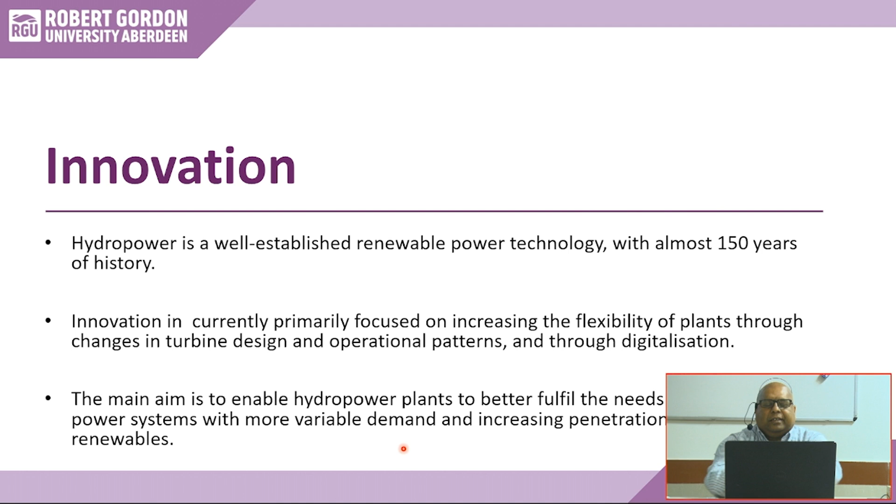Maybe you think you have to be somebody like Einstein or Newton to innovate something, but it's not actually like that. It's actually looking at what you are doing in everyday life and how you can make changes to make it better. Come up with a new system, new product, new process, a more efficient way of doing things. A simple thing will be innovative, which is not there, but you are bringing in there to make it better.

Think about this all the time. I talk about innovation all the time because innovative products will only keep the economy going, because we are moving away from almost an agriculture-based society to an industrial-based society. Even we are not having large industry in many Western countries anymore, and it's moving into automation and AI and things like that. So innovation is the key.

Don't think you have to be like Einstein or Newton or someone else to become an innovator. You can be an innovator if you think about what I'm doing today, how I can make changes to make it better, something new, improve the process.

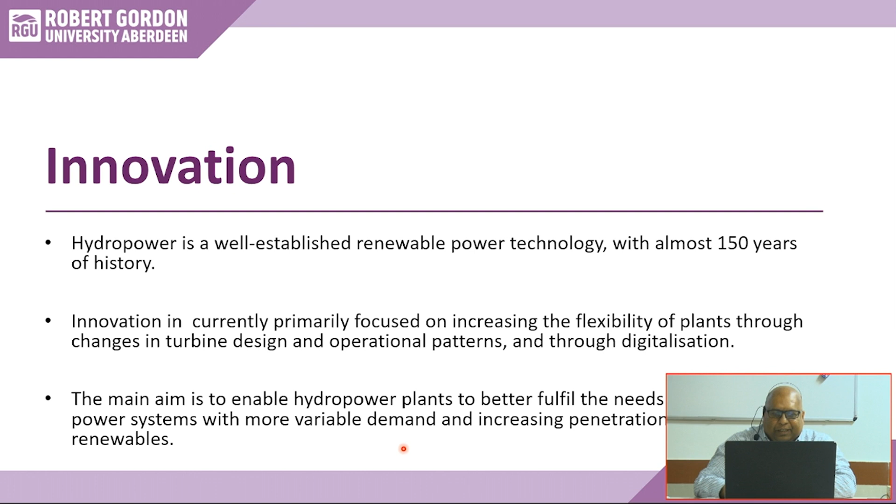Let's look at hydro energy devices that have been there for 150 years or more. Pelton wheel I talked about - these are the conventional energy source. In a Pelton wheel, you have to have a big reservoir water body. It comes through a pipe. It has to be very high, maybe 100 meters, water coming down through a nozzle at very high speed, and it impacts on the blade, and that rotates the blade. If you attach a generator on this, you will generate electricity. To use that, you need a high water head, maybe 100 meters high. You have to collect water at 100 meters high and get it down through a pipe. That is called a Pelton wheel.

Then you have a Francis turbine, which can work at less height, maybe 20 meters of water. The advantage of this is that it runs as what you call a reaction turbine. The water comes through a big gap here. Water comes in, through the body, and goes out, and this starts to rotate. So water comes to the blade radially and discharges axially down. Water comes from here, goes radially in and then out. This is a Francis turbine.

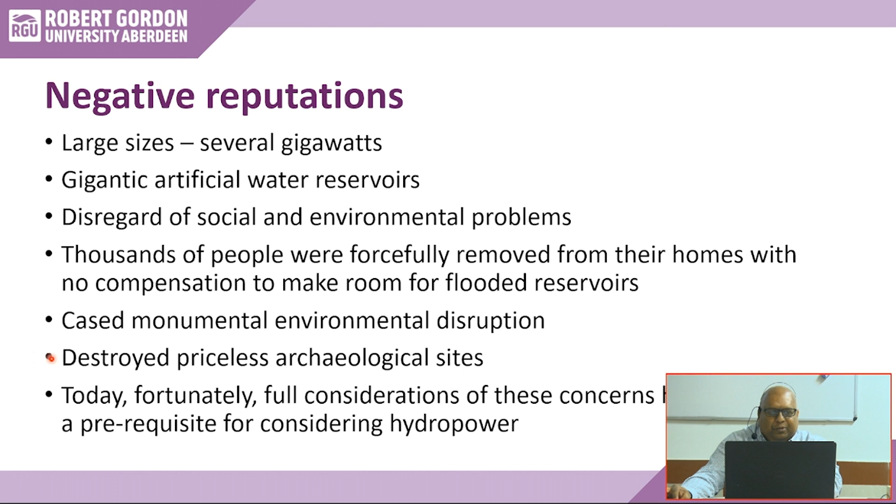Today, fortunately, full consideration of these concerns has become a prerequisite for hydro power. These days you won't be able to avoid that, because the market for electricity generation is mostly privatized now, especially in Western countries. If you want permission to build this type of hydroelectric power plant, you need to consider the social impact and environmental impact of every aspect. You have to write a report with detailed analysis before you get permission to build that type of power plant.

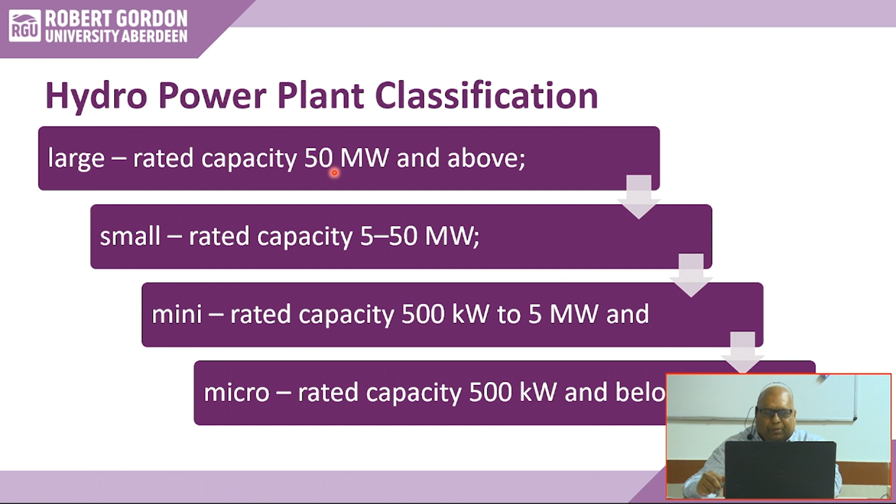If you have large rated capacity, 50 megawatts or more, we call it large. Small capacity is 5 to 50 megawatts. Mini rated capacity is 500 kilowatts to 5 megawatts, and micro, the smallest one, is 500 kilowatts or below. These are the power ratings we use for hydro power plants. So from megawatts we can go up to gigawatts, a massive amount.

So that's traditional hydropower. Now let's look at modern approaches, what you can do without gigantic environmental destruction and huge expense, since traditional hydropower requires building a whole dam with major civil engineering effort that takes many months.

So there's the hydrokinetic turbine, or HKT. How does it work? It works similar to a wind turbine, which you may have seen in parts of India, like in Gujarat, where there are a lot of wind turbines.

The principle is the same: it's kinetic energy, meaning velocity. Fluid coming in at high velocity impacts a surface or blade and rotates it. So you need to create rotational motion from the linear motion of wind or water flow, using a device called a turbine. The turbine has a blade; water or air impacts the blade and creates a force that makes it rotate. Basically, your linear force and linear velocity turn into rotation.

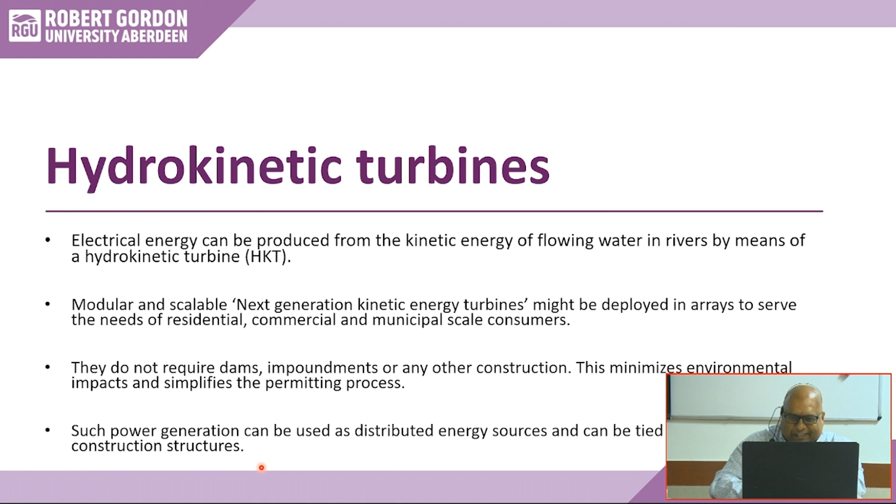What is the advantage of this type of hydrokinetic turbine? It is flexible, and intermittent source you have to think about, as water flow rate is almost uniform in many rivers. You have to think about how much water varies with time and space, but it's more or less sometimes intermittent, sometimes continuous. It's easiest to regulate by storage, so if you have flexibility or intermittency, you just put a battery to store energy.

This resource is widely dispersed. You can see the river is everywhere. I showed you the map of India, right? Many rivers there, and they are high flowing rivers. I gave you 6 locations, but I could give you 50 locations actually, more than 50, or maybe thousands of locations where you can put this type of turbine and make it useful.

And these are small structures. Maybe you have a big dam, and an enemy country thinks, okay, we'll create some bad thing for you, so they can come and bomb this dam, and that will flood the whole city or town. A lot of disasters can happen. But if you have this type of distributed small wind turbine or hydrokinetic turbine in different places in the river, then you are not disturbed by war or civil disturbance where they can create a big problem.

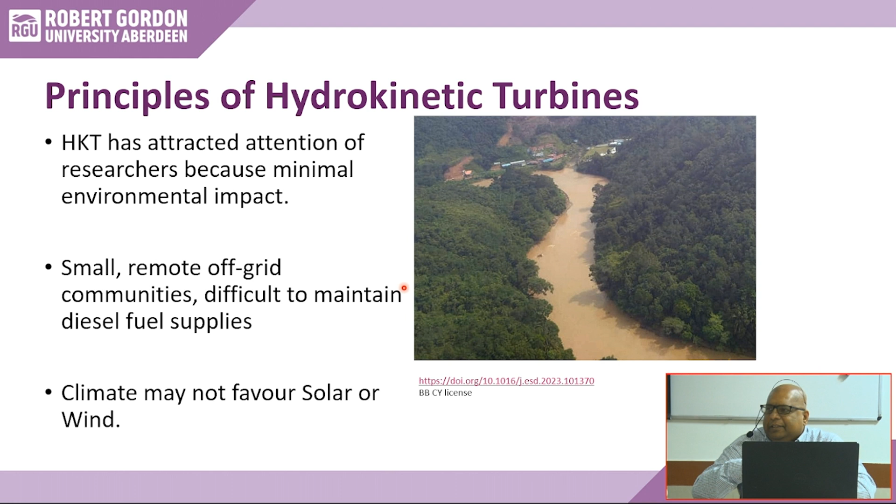Okay, so let's look at one or two designs. But again, I say come up with your own idea. So these are the designs - there are many other types of design. I only got this type of thing because of copyright issues. I can Google search and cut and paste any figure, but I am not allowed to use that for giving a talk like this - I have to have copyright. So the only things I found are open access or have permission to use. Those are the things I am showing you here.

You can run the power line from there to the shore in many different ways, either submerged or overhead, whatever way you want to do it.

Okay, now we go back to the mooring system. We talked about which bridge? Howrah Bridge. Is there a Hooghly Bridge also, or did I just make that up? Oh, Howrah Bridge is on the Hooghly River.

Okay, so here is the mooring system. What type of mooring system do you think is there? How is it put in water? If this figure is not clear, it looks like there are two floats, similar to two country boats. You create this type of float, and then the structure with your turbine blade rotates, hanging from this boat-like structure, and you generate electricity here. So you don't need the bridge, you can have another type of float to hold it in place.

Okay, look at the blade. It is a straight blade. Here is a straight blade. Now what happens? Water is coming in, it hits there, and you get high lift, so it starts to rotate.

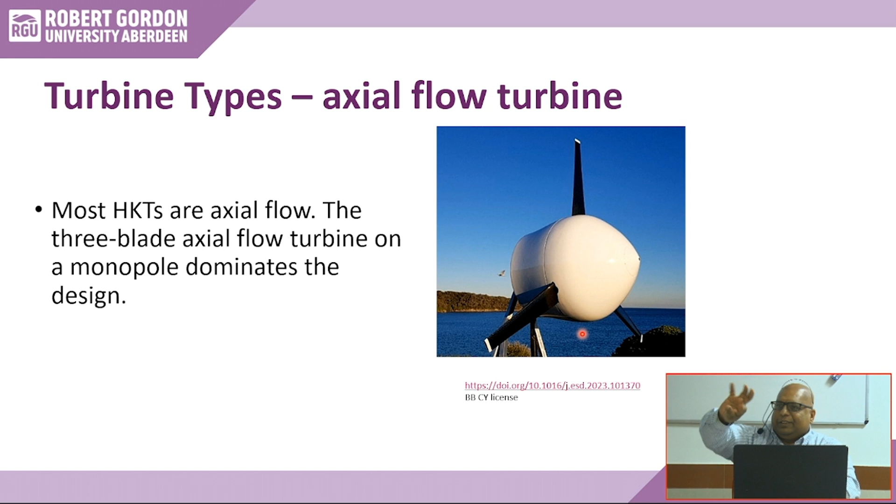In this other type, all the blades face the flow all the time because it rotates axially with flow coming from the front. But in this type, it rotates like this, so the flow hits the blade but not all blades are exposed to flow all the time—there's a gap where flow passes through. So the torque is not uniform on this blade.

So how can you make the torque uniform? That means all the blades stay in touch with the water—when water is flowing, some portion of the blade is always facing it. How do you do that? Your friend mentioned this before—did you say that? No. What you do is change the blade structure, make it curved.

Have you seen that type of blade? This type of curved blade makes the torque now uniform, because the front part of the blade faces water and rotates away, then this part faces water, then this next part faces water.

Once it's rotating, every part of the blade is in contact with water. That's the advantage of this type of twisted blade, where you get more uniform power on the shaft. So you don't have micro changes in the power output. You need to have a uniform rotation of the blade.

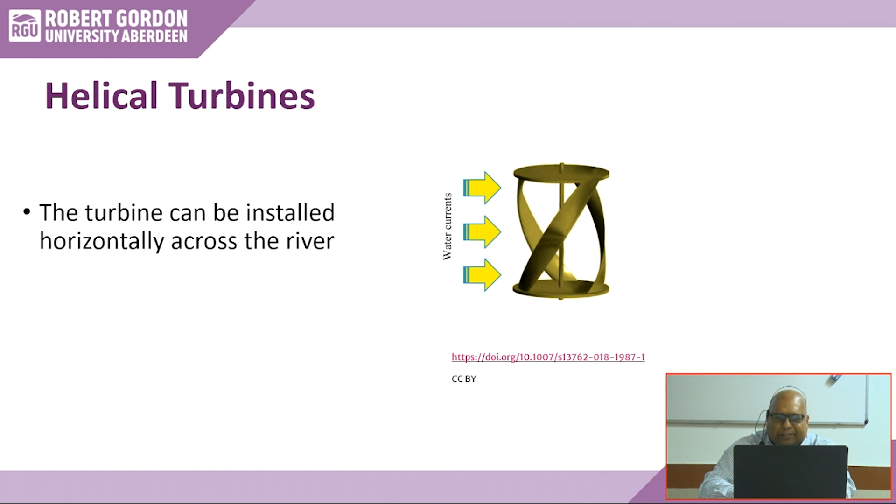And this is the anchor, I think—this straight pipe going down, anchoring it. Or you can have a simple anchoring with a cable or thread, whatever you call it, with an anchor to fix a boat there, right? An anchoring system. Then electrical cable, electrical control, converter, inverter, all of these things.

So remember our objective, the first challenge I gave you—I'm not forgetting that. You have to keep in mind I will need an answer, a design from you after 5 days. We want to design a 5 kilowatt water turbine running at 2 meters per second. Here it's 3 meters per second, but we saw 2 meters per second. It costs tens of thousands of US dollars for supply only, not installation, making the install cost prohibitively expensive for all but demonstration.

So usually when you come up with the technology, you can apply for funding from government sources, the European Union, or other funding bodies. Once you get the money, you can build this type of thing and demonstrate that it works, and that demonstration costs a lot of money. It doesn't matter, because for first innovation you need to show it works, and in order to show it works, government usually pays the money to build a demonstration unit. Whatever cost is there, it doesn't matter.

But when you want to commercialize it, your electricity cost, what you call levelized cost of electricity, we'll talk about that—it takes into account capex and opex. Capex means capital expenditure, opex means operational expenditure, and things like that. From there, and how many years it will last, maybe 25 years usually or 50 years depending, we can calculate the levelized cost of electricity. And that electricity price has to be less than what is available now in the market, otherwise nobody will buy it at the end of the day. So as an engineer, you need to be able to calculate the levelized cost of electricity produced from this system, and we'll look at how we can calculate that further down.

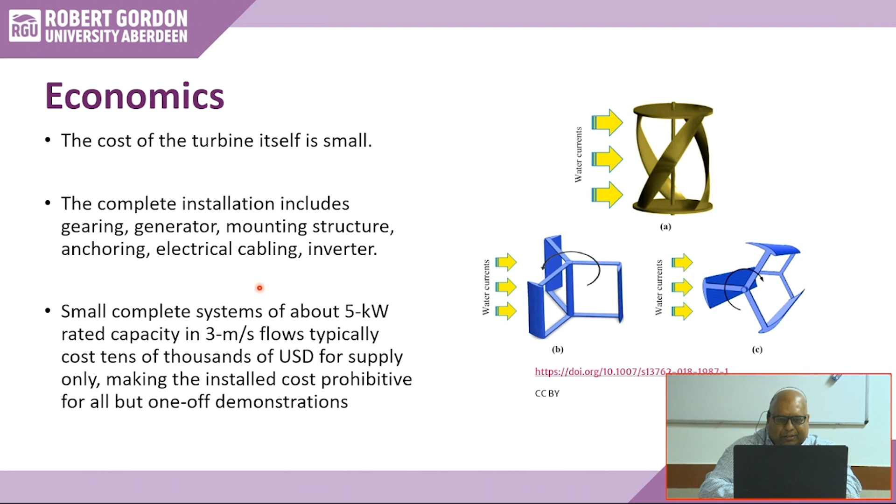Turbine, affordable—everything you have to think about, can I reduce cost? If you have a 4-blade, material cost is high; 3-blade, material cost is less. But you have to balance that against power output or the uniformity of torque. Then think about manufacturing—4-blade may be easier than 3-blade, because for 3-blade you have to accurately measure the angle while putting the blades in.

So, simple, reliable, affordable turbines—we need a huge, profitable potential market for such turbines to deliver useful power. There is a huge and profitable potential market there. You come up with a new design, cheaper, simple, reliable, and the market is there to buy the innovation from you. There are thousands of sites in many moderate-sized rivers around the world where you can put it.

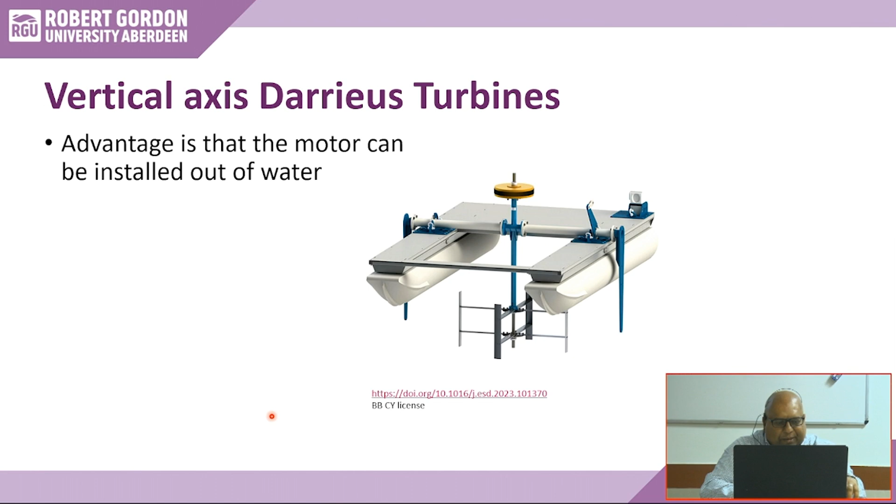Okay, now I have two questions here. I'll give you a break of 5 minutes, then move on to the next topic. But before that, do you remember the figure I showed you in my first lecture, the introductory lecture? Let me go back to that, then I'll give the 5 minute break and we'll move to the other topic.

As I say, there's no right or wrong answer here, it's just a guess, a fun answer. Anyone want to say something? A student suggested there isn't much potential because the water is still over there. Okay, that's a good answer. Anyone else who hasn't contributed yet—what do you think?

So what is the principle? The principle is to start off with this formula, which is called the calculation of power.

Look at it here. This is the power output you are looking for, 5 kilowatts I talked about. Half rho, where rho is the density of water, which is 1000 kg per meter cube.

But there is a little point here about the density. Remember in the introduction, Professor Somnath Chattopadhyay talked about water with silt, water mixed with mud. If you have this type of water, your density may change and be a little higher. So be careful about what type of density you're using, what type of water it's mixed with, some other solid particle or not.

This is density. Area is the swept area or the cross-sectional area of the turbine, and this is calculated as pi over 4 times diameter squared.

Then you have velocity, water velocity to the power 3, times a power coefficient we call Cp, and then efficiency. This efficiency is about 70%, and is the efficiency between motor, rotor and generator and things like that.

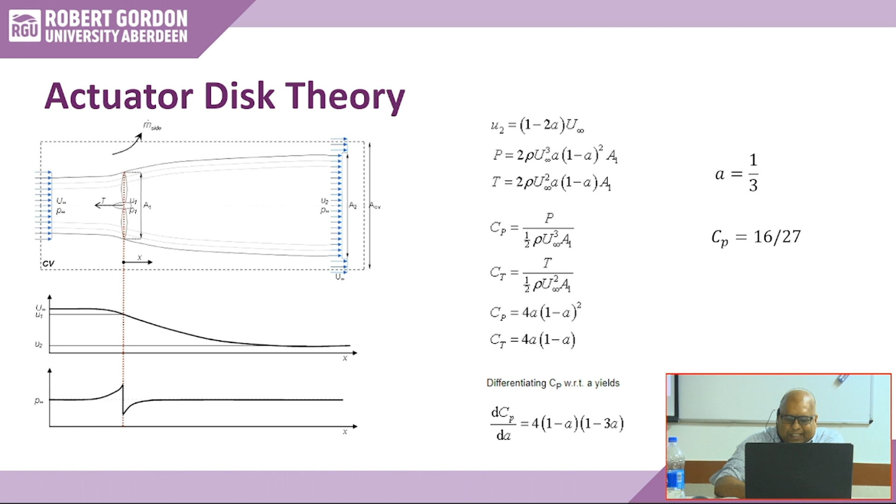So that is all we call actuator disk theory. This is a very simple theory, and you can use that theory to design our turbine again. So that's basically to find out your power output.

This time I have done another calculation. Your power output is 746 watt, but our objective was 5 kilowatt. I didn't do the calculation because I want you to do the calculation, so that's why I didn't do the 5 kilowatt power calculation.

So you have 746 watt of power generated, and water velocity is 1.5 meter per second. You have a Cp value of 0.4382. As I told you, the maximum theoretical value is 0.593. Theory says that, but in practice, different turbines produce different values of Cp. It's okay, 0.4382, that's the Cp value you get. Your efficiency is 70%.

Your density of water is 997 kg per meter cube. If you put these numbers into this simple equation I showed you here, this is the Betz equation, you put it here and you get a value of area, swept area. From there you can calculate diameter and also radius. So your radius now comes to 0.678 meter or 0.68 meters.

Okay, so that's the blade radius, if you assume there is no hub. So there is a hub radius, we can take into account the hub radius, we can reduce the blade size further down.

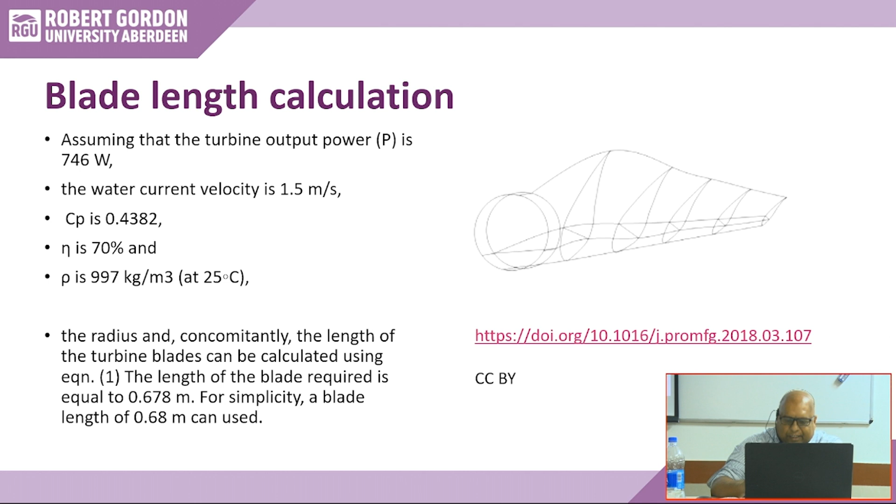Now to figure out what type of blade we need, we have to go into details. So let's look at aerodynamic details. But before that, there's an exercise to understand the river characteristics, that is, how we can use this actuator disk theory for designing a turbine.

You first have to understand the river characteristics. Measure the average flow velocity of the river. For Indian rivers, this typically ranges from 1 to 3 meters per second, which is a very good quantity. Depth and width of the river are also important to know, but Indian rivers are generally very deep and very wide, so that's not a problem.

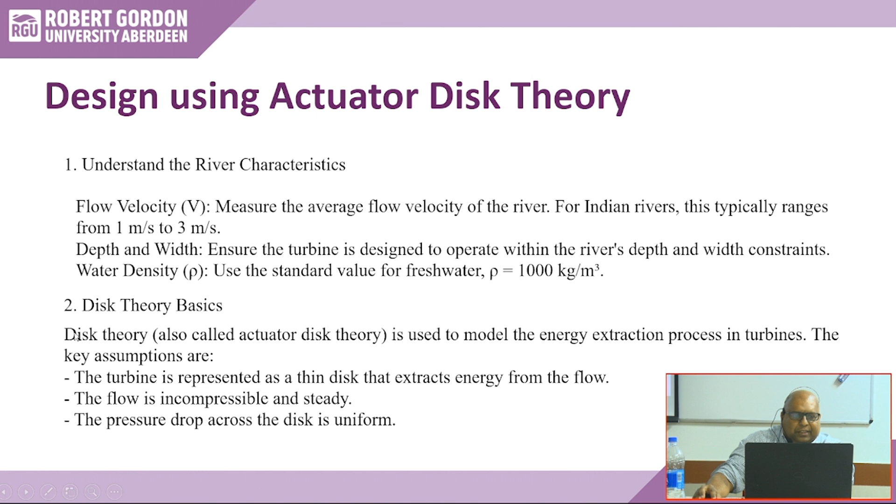You can use the disk theory to calculate diameter from that formula. So this is your formula again. If you know your CP value, you can calculate the swept area and diameter.

Another thing you have to think about is tip speed ratio, an important parameter which is the speed of the tip of the blade divided by the speed of water. This value is usually taken as 4 to 5, depending on the blade type design. If you plot tip speed ratio versus efficiency, or tip speed ratio versus CP, you find that different types of turbines have a range of tip speed ratio to give you the optimum value of CP. Some turbine blades have a very narrow CP range, and some have a very wide CP range.

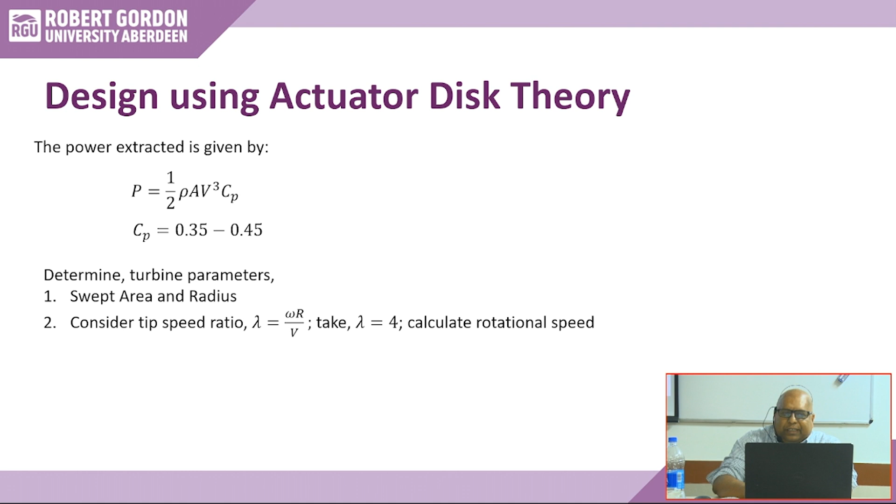And that has to be synchronized with the speed of the generator, because otherwise the generator runs at a fixed speed. So either you need a gearing mechanism or something else to control that speed. So actuator disk theory, with its very simple equations, will actually help you do a kind of design to start off with.

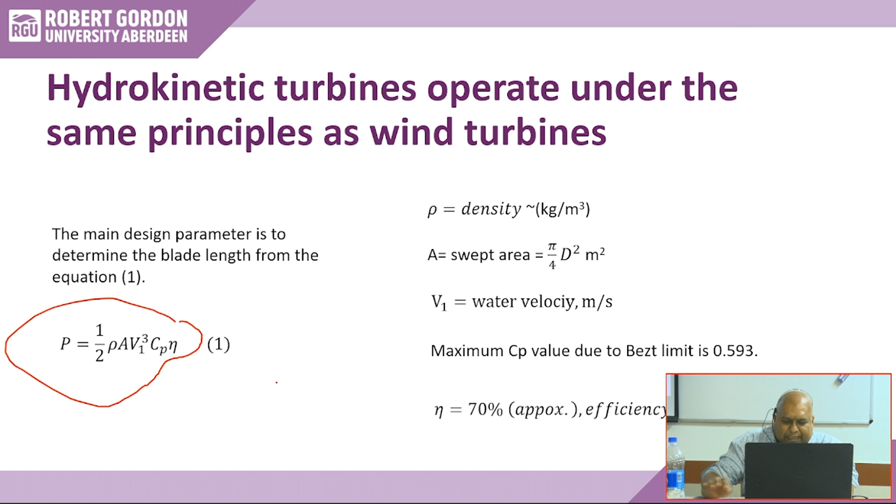This simple equation helps you start off with the design process. Now what type of blade did we do? You can go back and look at more complex theory. So let's look at complex theory here, what you call the blade element model. We'll spend a little bit of time here to make you understand what is happening.

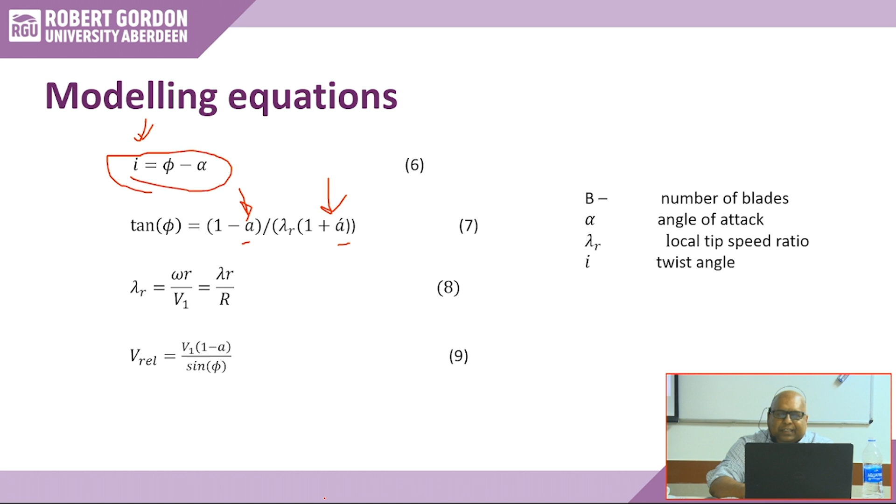Let's make the calculation a little bit easier, not getting 100% efficiency. So for each section we start - this is our hub, this is our tip. We need to know, for each R, we need to know C. So this is another R, another C, another R, another C, another R, another C.

For each of these R, you need chord length. You see the blade way is designed here - the chord length at the beginning is high because this part has less angular velocity here. Omega R is less because the radius is small, so omega R is less. So you have to have a bigger area to extract an equal amount of power from the whole blade. So this is a longer chord length here, longer chord length here, and as you move away, the chord length becomes smaller. So R has an impact on chord length.

So this is the equation for chord length: 8 pi R sine phi divided by 3 B CL lambda r. B is the number of blades - again you predetermine the number of blades, maybe 3, maybe 4. From there you can calculate your C here. Then you can calculate A from this formula, A prime from this formula. Phi is 2/3 of tan inverse 1 by lambda r, and this is what you call the solidity of the blade, which is number of blades times chord divided by pi r. So you can use that simple formula to design the blade.

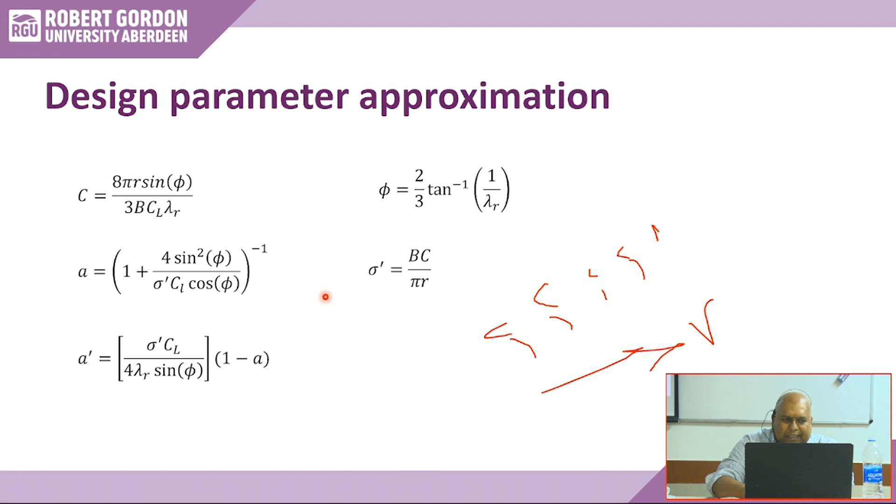Otherwise your system will break down. You cannot control the whole system where you are supplying power - you have to have a rated power, you control at that. So if your velocity is more than your design velocity, you don't basically extract more power. Similarly, if the velocity is less than your rated velocity, then you can extract some power, but it's not at the highest efficiency. If you want the highest efficiency, you have to do a little bit of controlling - that will come later.

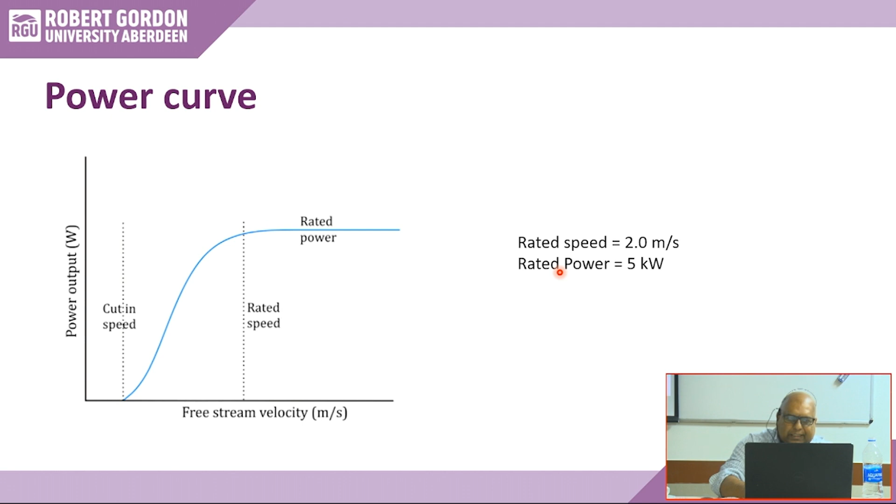Okay, so let's look at vertical axis turbine. This is horizontal axis, simple calculation. Vertical axis is a little bit more difficult. What we are looking at is two blades.

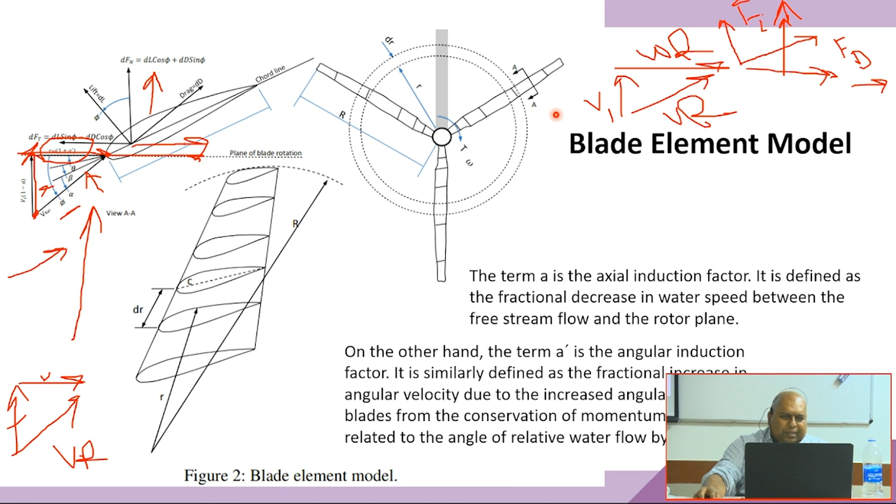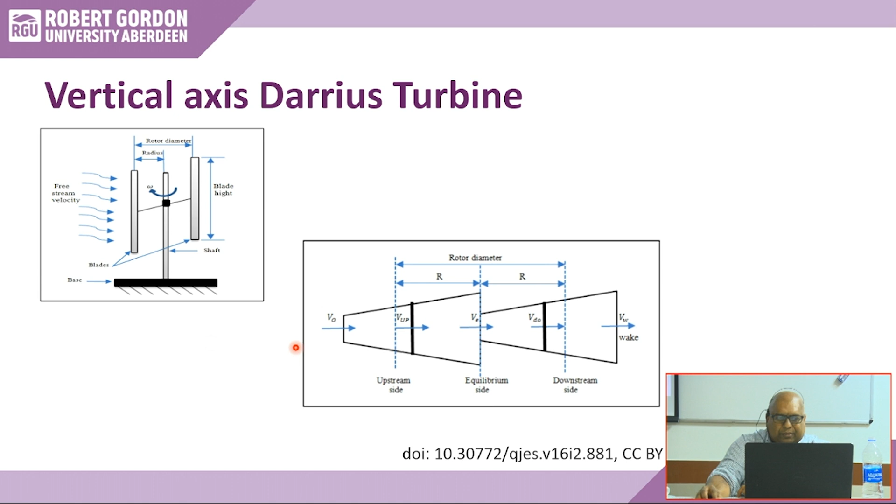Previously, we just considered 1 blade at a time, and then transferred it to 3 blades or more. But here, you have to consider 2 blades at the same time. So we have 2 actuator discs: one flow coming in through the blade, and then it becomes a little bit smaller, comes through the next blade, and then goes out. That's the 2 actuator discs now - 1, 2, 1, 2. 1 blade, 1 actuator disc.

So once you draw this one, you can then play with different types of velocity changes. So you can then come up with an equation for upstream velocity. We can come up with an equation for downstream velocity. You can come up with an angle of attack, this one at upstream, and angle of attack when the blade is downstream somewhere here.

So by using the same logic, same velocity vector kind of thing and velocity triangle, we can then apply the same principle in forward and backward blade and come up with a few equations. So at the end it's a simple algebraic equation that I am not going to go through, but at the end you should be able to calculate force in normal direction, which is useless, but tangential direction will make the blade flow. So it's a very simple equation, half rho CL velocity squared and Cp at the top.

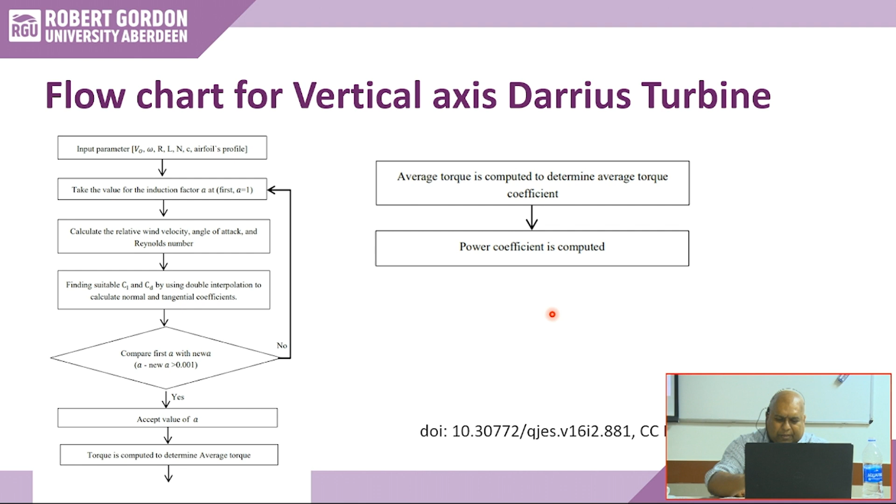Finally, when you get the A value, you put it in the equation for power coefficient and things like that. So this is much more complex calculation compared to the previous calculation. Okay, so all types of equations I have, then you can put it in a software to come up with a design parameter quickly.

Okay, so the software is written in Python. Anybody knows Python here? Python code? Only one. Anyone else? Okay, two. It's very simple. Anybody knows MATLAB? Okay, so I have got two codes actually to show you - one is written in Python and one is written on Excel to design a blade. So I will share the code with you, so then you can design it at your own time.

Okay, so let's look at how the blade works. So if I can show you here, give me a second. This is your Python. Let me see if I can find the Python code. Okay, Python code runs on a software called Spyder.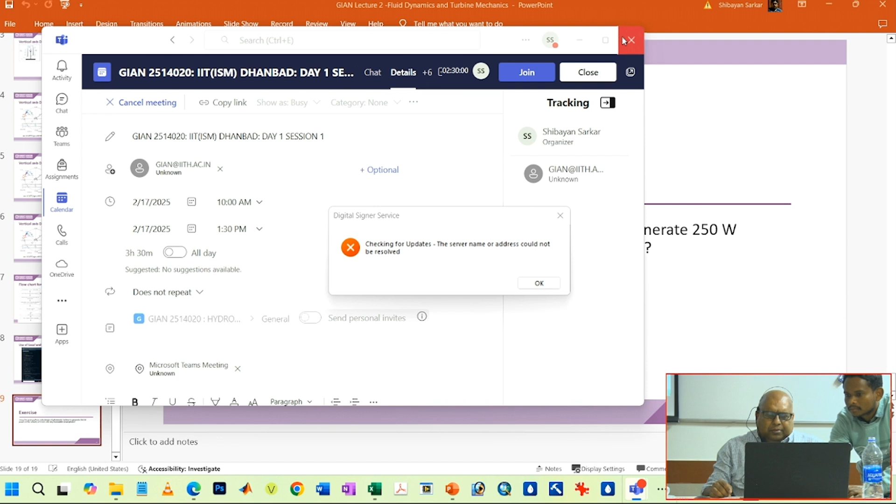No, okay, let me see if I can get strings here. Okay, then go to teams. Which one is the teams here? Okay.

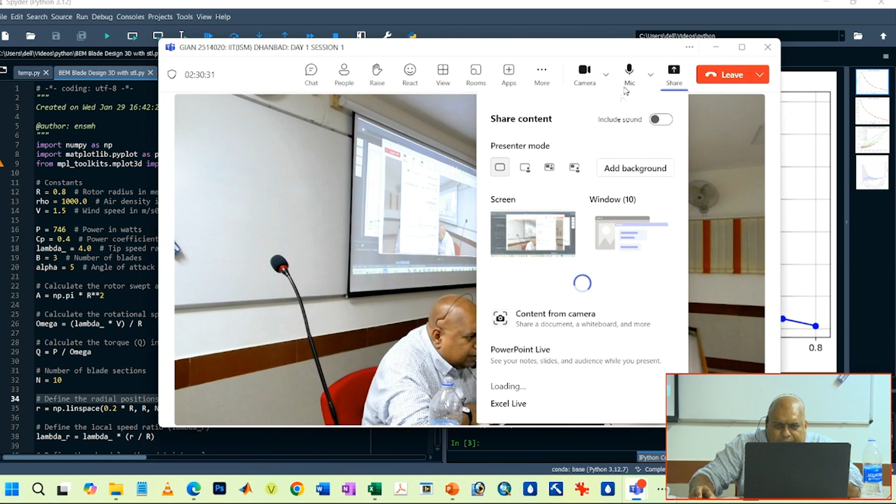So what does this code do? Let's look at what we have. We have a radius of the blade, 0.8 meter - just a number, you can calculate it. First you have to calculate this radius from the power given, 5 kilowatt, 2 kilowatt, 1 kilowatt, whatever, and the velocity given, you calculate the radius. So you put the radius here, density of water, and the water velocity.

So your power is 746, Cp value is 0.4. This one, tip speed ratio, is an important parameter you have to decide. Also the number of blades you use, 3 or 4, you have to decide. And alpha, angle of attack - this is the most important parameter for the aerofoil. What type of aerofoil are we using?

We are using aerofoil type S822, and this has got coordinate direction between XC and YC. So these are the parameters for aerofoil locations, and then you have to scale it up and things like that, and then you plot it.

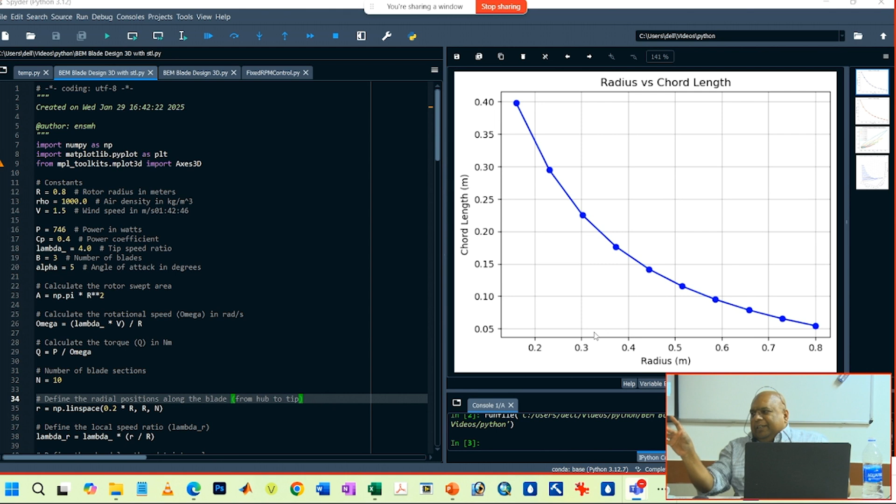So these are the simple equations you put into this code. The first one you look at is radius versus chord length, and you can see if your radius increases, chord length tends to drop. As said before, at the smaller radius you have a longer blade, then the blade is squeezed and becomes small.

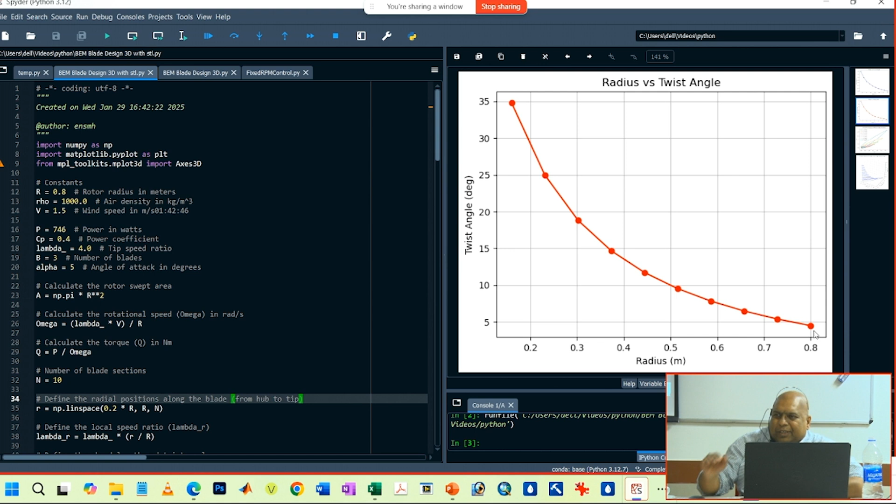Then we look at the twist angle - how much you progress from the hub, or from the center line. As you go away, how much the blade has to twist to get the optimum. In the beginning, the twist angle is 35, so the first part of the blade has to be twisted quite a lot, and then as you go down to the front edge, only 5 degrees, not a lot.

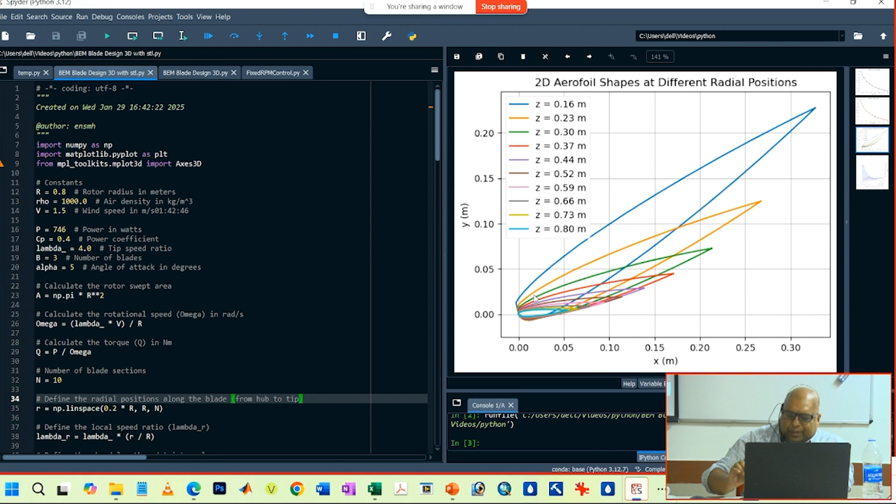If you want to combine it together in a 3D plot, this is your actual blade profile. The first section has a large twist, and you can download this data point and put it in SolidWorks, and a function called loft allows you to add those sections into a solid blade.

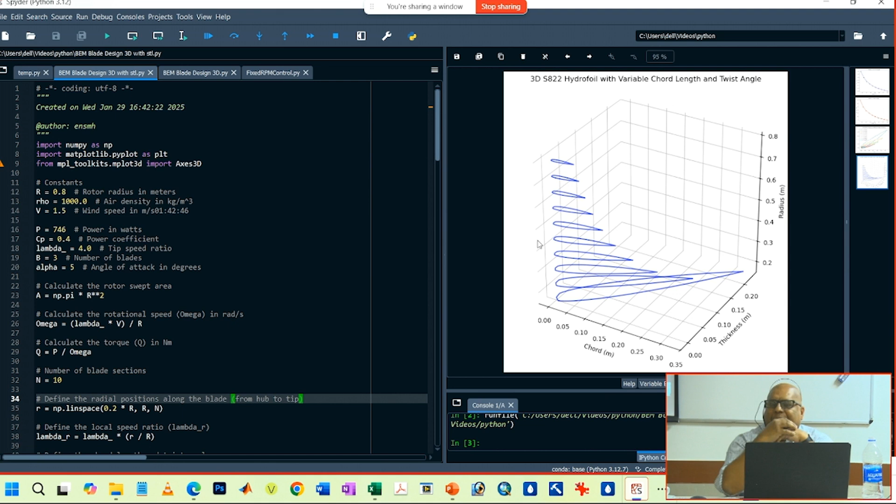One blade - then you can copy it into 3 blades, and then you can do CFD simulation and things like that. Tomorrow we have a whole day of CFD simulation exercise and talk. So that's how you design a blade.

So coming back to 5 kilowatt - I could have put 5 kilowatt here, right? I didn't put it because I will give you the code. You put 5 kilowatt here, you put your radius - you have to calculate the radius - and your velocity is 2 meters per second. So none of the numbers I actually give you go directly into your actual design code.

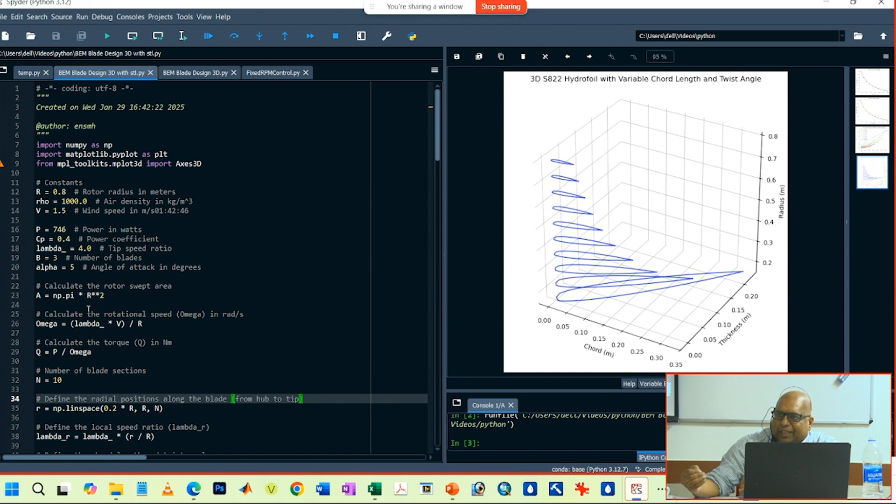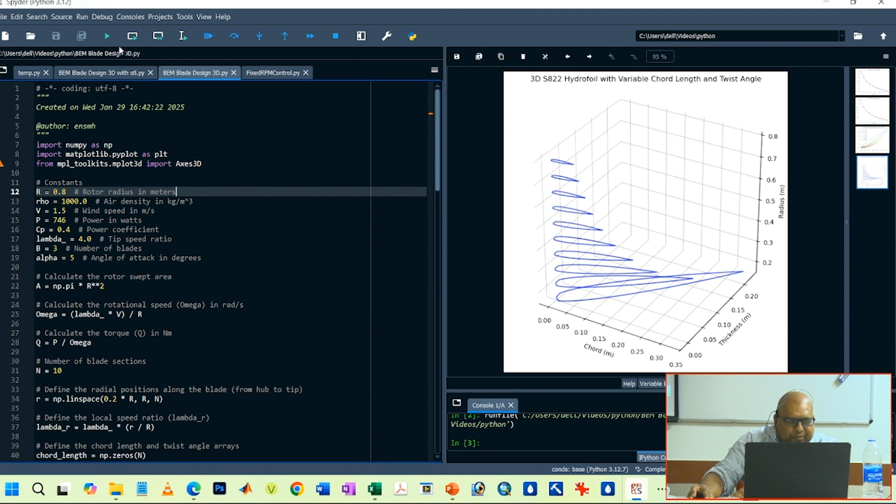If you get access to this, speaking with Professor Shibayan, then you can play with this. If you don't have Spyder, it's on Google Colab - you just put it in, you don't need to understand it fully, you put it, run it. It's very simple code, if you read it you can understand it. That will help you design the code. Quite a number of codes I have written for your calculation and things like that.

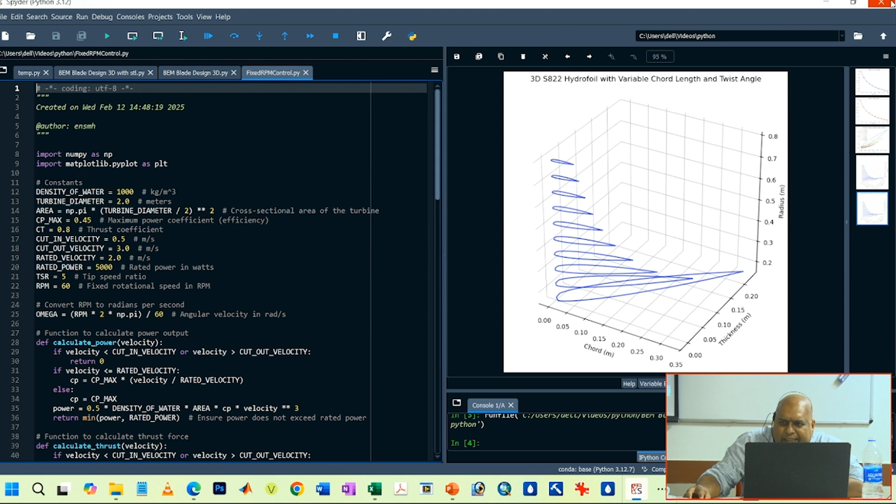And these are the controls - control we will teach later. Is that clear? Is that clear what I am saying? Yes.

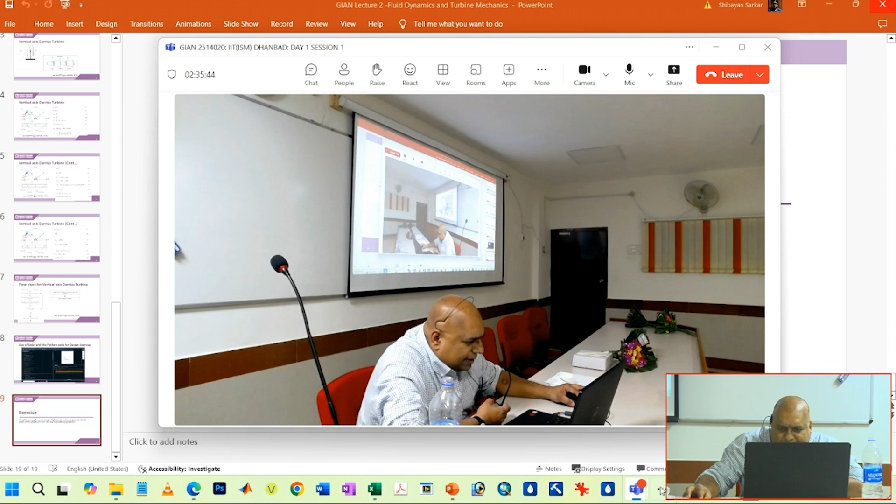Okay, so the code is there, will be shared with you so you can play with it, design it, and things like that. Now I go back to my slide. Where is my slide here? Up to this point. Oh no, yeah, it's here, this slide.

Okay, give me a second.

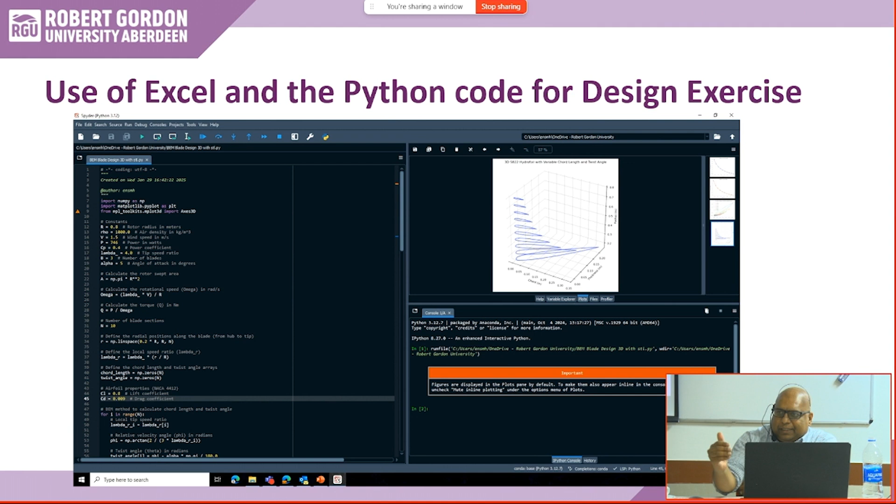Yep, I think I have an Excel code also in the folder that does the same thing. It gives you a graphical presentation and things like that. So for your exercise, use this code to go back and design your system.

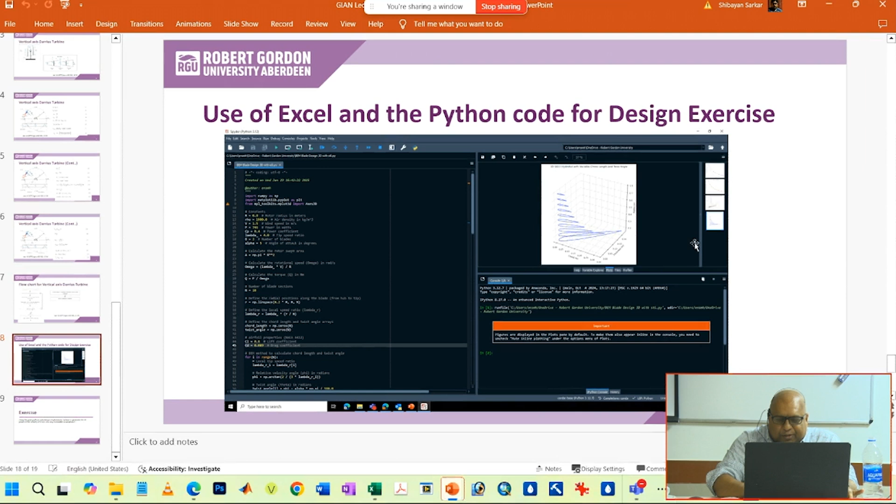What's the exercise they give you? 250 watt, 2 meters per second. I gave you a lot of ideas and parameters on how to calculate, with design code written in Python, so you should be able to come up with some initial engineering design. On top of that, if you can learn about the velocity triangle and angle calculations and use those formulas, it will be a worthwhile exercise.

Now in the afternoon we'll look at materials for this type of blade, what type of sustainable material you can use for blade design.

Before I leave, let me ask another question. Can anybody tell me what type of blade design you are thinking of for your exercise? I will check tomorrow with all your notes and sketches, whether you've done horizontal, vertical, or whatever type of design. I gave you some clues, some exercises, some notes, but I also want you to think innovatively and come up with a design, mooring system, cabling system, and materials.

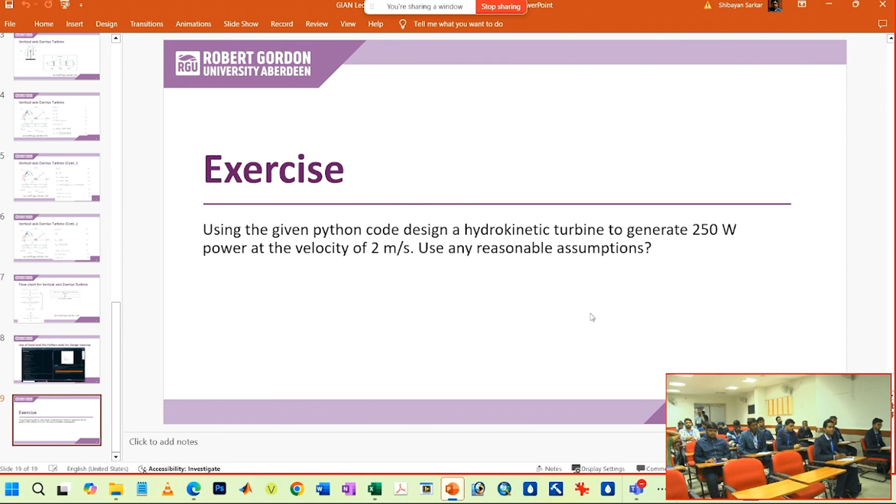Think about it, there's no ready-made book answer. I'm not interested in what's written in the book. I want to know your personal experience working with metal, working with material. Somebody already said heavy, that's a good answer because it comes from your experience, not necessarily something you find in a book.